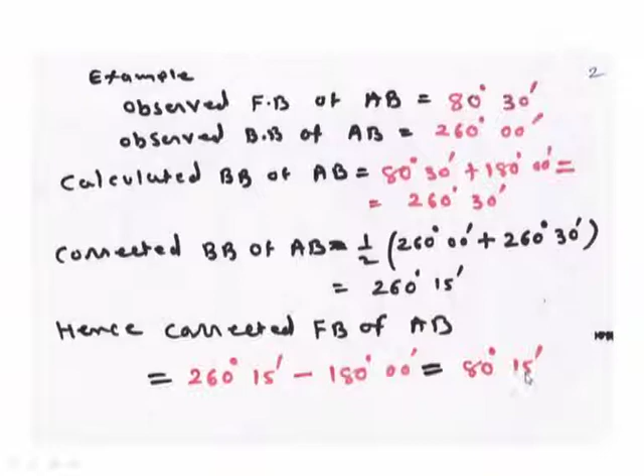Now, there are two methods to apply the correction for local attraction. The first method is the interior angle method. First, for our traverse, calculate all the included angles, and then apply the check, which is (2n minus 4) into 90 degrees. If the total sum of angles does not match (2n minus 4) into 90 degrees, there is a certain error. If there is no error, go ahead with the correction of the bearing. If there is an error, it is equally distributed among all the angles of the traverse. Then finally calculate the corrected angles.

Then, starting from the unaffected line, all other corrected bearings are calculated. How can you find the unaffected line? We have already told you that if the difference between fore bearing and back bearing is 180 degrees, then this line is free from local attraction. If the difference between fore bearing and back bearing is not 180 degrees, that means there is local attraction.

So out of the traverse, we have to find at least one line, or the line which has the minimum error. Then, as we have seen in the previous example, we correct the fore bearing and back bearing, and then by using our angles, we find all the bearings.

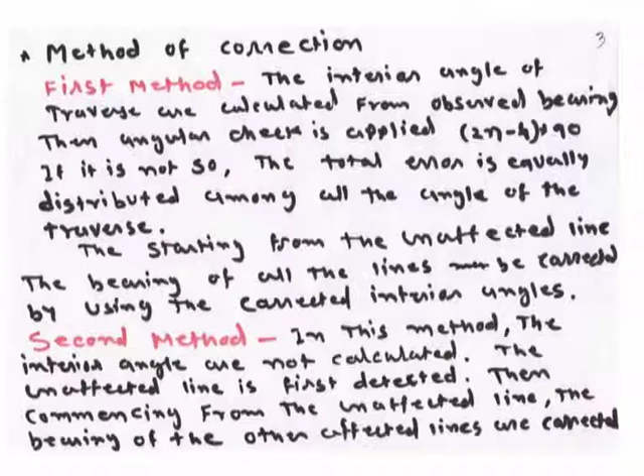In the second method, the internal angles are not calculated; the unaffected line is detected first. Starting from the unaffected line, we calculate all the bearings using fore bearing, back bearing, fore bearing, back bearing, and we correct the bearings first. Then we go for the calculation of the internal angles. So these are the two methods. Now let us see and clear things up.

Here the example is given: the following bearings were observed with a compass for the closed traverse A, B, C, D, A. The lines are AB, BC, CD and DA. Because it is a closed traverse, the starting point is A and the ending point is A. The fore bearing is given as 120 degrees, back bearing 300, 200, 20, 310, 131, 30. Now the question is, where do you suspect local attraction? Find the included angles and correct the bearings for the lines.

First, we have to find which station is affected by local attraction, as well as calculate the internal angles. Before solving any compass problem, first plot the traverse by approximation. One point is marked on the paper. The fore bearing of line AB is 120 degrees, so approximately draw a 120 degree angle and draw line AB of any length. Then mark point B.

From point B, we have the bearing of line BC, that is 200 degrees. So 200 degrees approximately comes here, and we draw another line, BC. Now we mark C, and we have the fore bearing of line CD, that is 310. So we draw line CD, and from D, because it is a closed traverse, the bearing of DA is given as 30 degrees, and approximately we join this line to A. So this is our complete traverse.

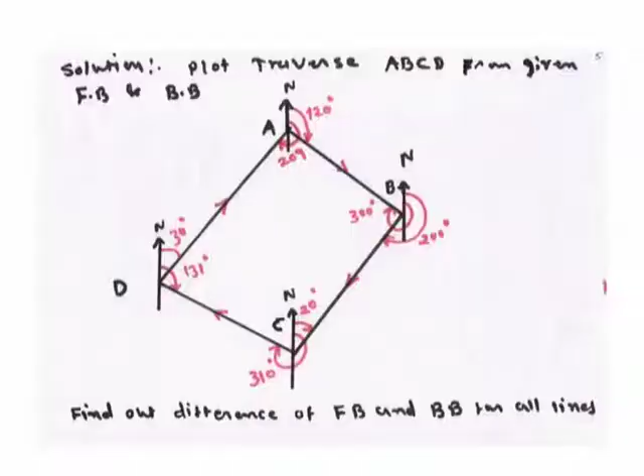If your summation of angles is 360, then there is no requirement of correction for the internal angles. But if there is a slight variation, say 361, or less than 359 or anything else, then you have to apply correction. Whatever the correction is, find it out, divide by the number of angles, and equally distribute. See how we calculate all these things. Now, first of all,

we put the line, forebearing, back bearing, and find out the difference. So here AB is 300 minus 120 degrees, that is 180 degrees. Here 200 minus 20, that is 180 degrees. Here 310 minus 131, that is 179. 209 minus 30, that is 179.

So from this table, you can see that here you are getting 180 degrees for the two lines AB and BC. Line AB and BC, that means the stations A and B are giving correct readings. Here stations B and C are giving correct readings. Only station D is not giving correct reading. Here the stations A, B and C are free from the local attraction, and the only affected station is D.

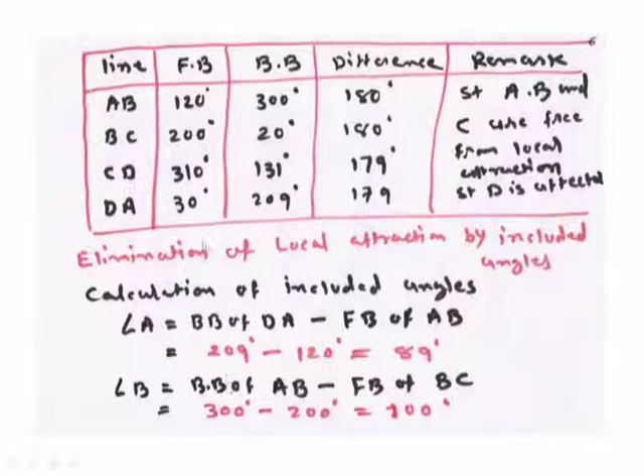Now, elimination of local attraction by included angle, because we are solving this problem by the first method. So first of all, calculate the internal angles, which I have already explained. Angle A is equal to back bearing of DA minus forebearing of AB, that is 209 minus 120 degrees, equal to 89. Similar way, angle B, that is back bearing of AB minus forebearing of BC, from this table, is 300 minus 200, equal to 100.

Now, from the figure I have already explained, there are two methods: the 360 minus exterior angle. This is the calculation of the exterior angle, that is forebearing of CD minus back bearing of BC. So 310 minus 20 will give the exterior angle. Subtract from 360, and you are getting the internal angle. And angle D is equal to back bearing of CD minus forebearing of DA, that is 131 degrees minus 30 degrees, equal to 101.

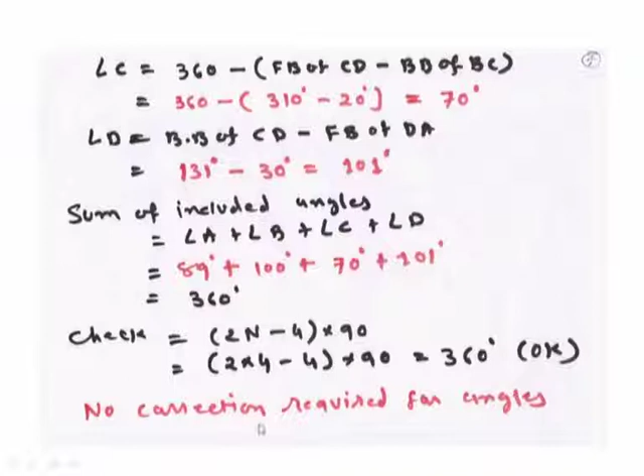Now, sum of the included angles, angle A plus angle B plus angle C plus D: 89 plus 100 plus 70 plus 101, the summation is 360 degrees. Apply our usual check, that is (2n minus 4) into 90, and here the n value is 4, so this is 360 degrees. So our calculated sum and check are the same, so there is no requirement for correction in angle.

Now our idea is to find out which station is affected by local attraction, as given in our example, as well as the corrected bearings. Here the stations A, B and C are free from local attraction. So whatever readings are taken from stations A, B and C are correct. So first of all, we list out the readings which are free from local attraction.

From station A, we are taking two readings: forebearing of AB and back bearing of DA. Similar way, from station B, we are taking forebearing of BC and back bearing of AB. And from station C, we are taking the forebearing of CD and back bearing of BC. Value may be anything, but we are taking these readings. Our stations A, B and C are free from local attraction, so all these readings are correct.

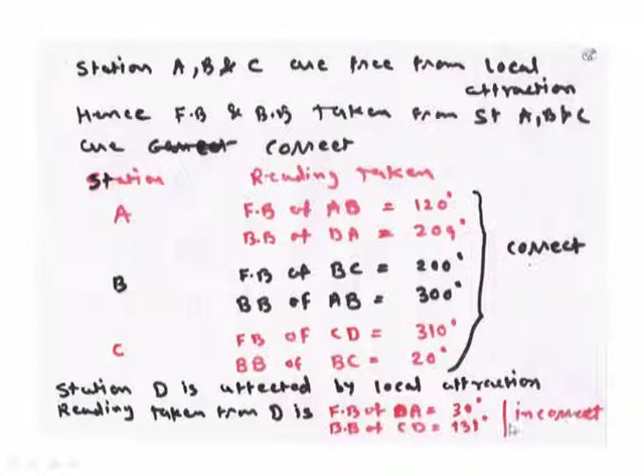All the readings are correct. By using this reading, we are correcting our D station reading. Station D is affected by local attraction. So from station D, what are we taking? We are taking two readings. Number one is the forebearing of DA, which is 30 degrees, and the back bearing of CD, that is 131. These two readings we have taken from station D are likely to be incorrect.

Now, how can we find out the correct reading? To find out the correct back bearing of CD, the forebearing of CD, 310, is given and is the correct value. Now using our formula, the difference between forebearing and back bearing is 180 degrees. Apply this equation and we find the back bearing of CD is equal to 310 minus 180 degrees, which is 130 degrees. So this is by our calculation.

And our observed value is 131. So there is an error of 1 degree. In a similar way, to find out the correct forebearing of DA, the forebearing of DA is equal to the back bearing of CD minus angle D. So here we are using the included angle, angle D.

We have a back bearing of CD which is correct. Here we are correcting this reading. So we put this value minus the angle, and we get the correct value of the forebearing of DA, that is 29 degrees. Once we get the forebearing of DA, the back bearing is simply, because this reading is less than 180 degrees, add 180 degrees. So it is 209, which is already given in our example data. See, this is 209. So what we found is right, because this is a cross check: calculated and given are both the same.

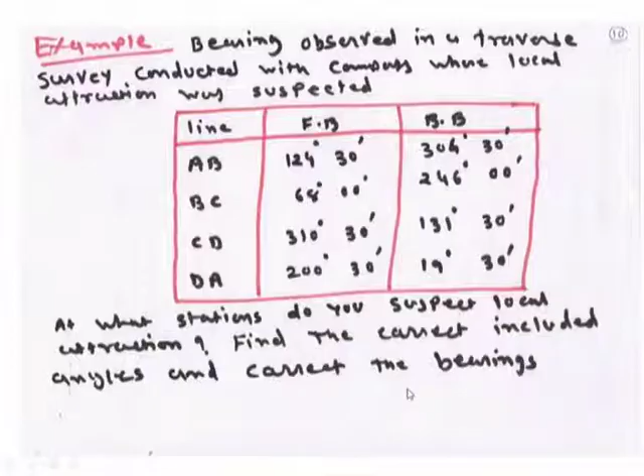Here we carry out the correction in the angles as well as in the bearings, so it is different from the first example. As in every example, whenever we require calculation of the internal angles, first we have to plot the traverse. This is the basic requirement. If you simply memorize the equation without plotting, you may make mistakes. So plot the traverse according to the measurements. The forebearing of line AB is 124 degrees 30 minutes, so this angle is approximately 124 degrees 30 minutes. Draw a line AB of any length.

Then from B, again mark a north line on the upward side. Now the fore bearing of line BC is 68 degrees. So 68 approximately comes over here. If it is 90 degrees, it will be like this. If it is more than 90 degrees, it is like this. If it is more than 180 degrees, it is like this. And if it is more than 270 degrees, it is like this.

So in which quadrant are you drawing the line? From common sense, you can draw this line. So use the fore bearing of the line BC of 68 degrees and draw a line BC. Now from C, draw a line CD, because the fore bearing of the line CD is given as 310 degrees 30 minutes. So it is in the fourth quadrant. So draw a line in the fourth quadrant of any length and mark a station D.

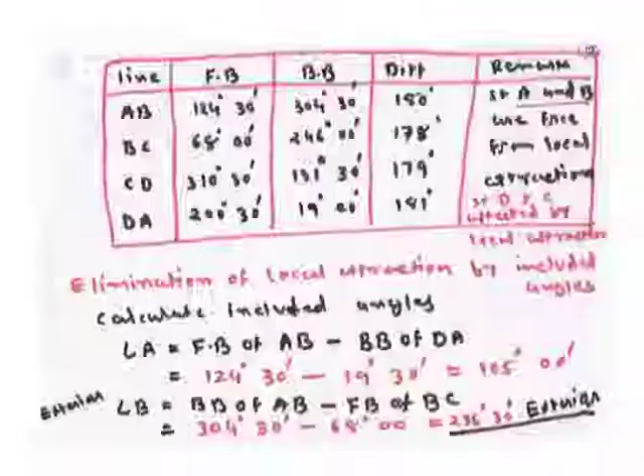Suppose the difference is 180 degree, as given here. That means stations A and B are free from local attraction. Now go to the figure. Here station A and station B are free from local attraction, so whatever readings are taken from A and B are right. Now from B we have taken the reading of fore bearing of BC. That is right because station B is free from local attraction. So if this fore bearing is right, then if we add 180 degree to 68, we get the back bearing. So the calculated back bearing is right.

So once we calculate the back bearing, then we add angle C, see the marker. If we calculate the correct back bearing, that means 68 plus 180 degree, we get the correct back bearing of line BC. Then if we add this angle, we find out the correct bearing of line CD. Forget about the previous reading. So we find out the correct fore bearing of line CD.

Then again go for the difference of fore bearing and back bearing, 180 degree. So here, whatever the reading you are getting, simply subtract 180 degree. So you are getting the correct back bearing. So once you have a correct back bearing and you have the corrected angle of D, correct back bearing plus the angle D gives you the correct fore bearing of line DA.

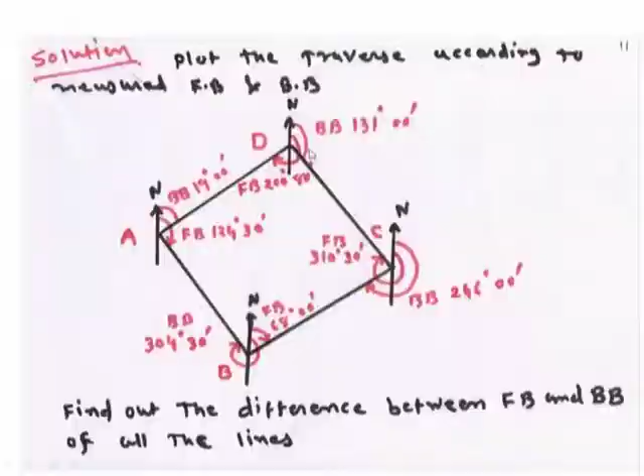First select the line whose fore bearing and back bearing differ exactly by 180 degree. Here for line AB, the bearings differ exactly by 180 degree, so both fore bearing and back bearing are correct. So first consider line AB. Fore bearing is 124 degree 30 minute and back bearing is 304 degree 30 minute. These are the correct readings.

Now for the line BC. From station B we are taking the back bearing of line AB, which is correct. So we have an exterior angle. Simply put the value 304 degree 30 minute minus the exterior angle of B, which we have already calculated, that is 360 minus the internal angle of 123 degree 00 minute. So you are getting 67 degree 30 minute, which is the correct fore bearing of line BC.

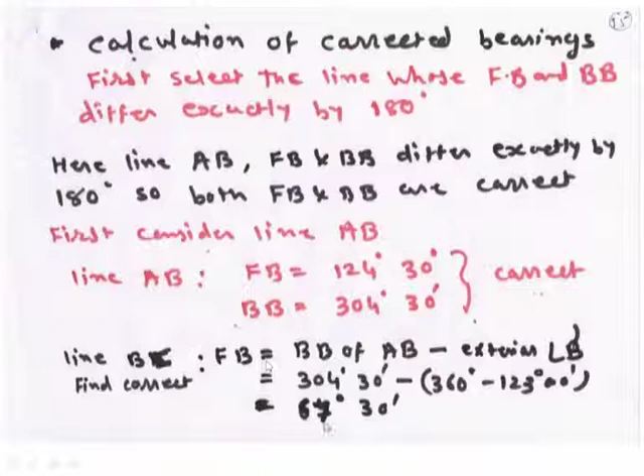Okay. Now we have the fore bearing of line BC, and we can calculate the back bearing. Because this figure is less than 180 degree, simply add 180 degree. So 67 degree 30 minute plus 180 degree is equal to 247 degree 30 minute. That is the corrected back bearing of line BC.

Now we have to calculate the fore bearing of CD. Okay? The back bearing of BC we have calculated, and we have the internal angle of C, which we have already calculated and corrected. So put here 247 degree 30 minute plus the internal angle of C, that is 64 degree. The value we get, 311 degree 30 minute, is the correct fore bearing of line CD.

Once we get the fore bearing, because this value is more than 180 degree, we can easily calculate the back bearing: 311 degree 30 minute minus 180 degree 00 minute is equal to 131 degree 30 minute. Similarly for line DA, fore bearing is the back bearing of CD plus internal angle of D. Here 131 degree 30 minute plus 68 degree 30 minute gives 200 degree 00 minute. And back bearing is 200 degree 00 minute minus 180 degree 00 minute, equal to 20 degree 00 minute.

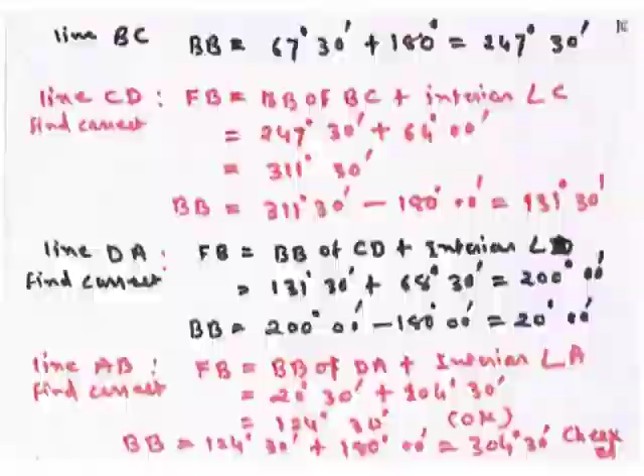Internal angle method. So here we have seen two examples. Number one, where there is no requirement for correction of the internal angles: internal angles sum to 360 degree, our check is 360 degree. The only requirement was correction in the fore bearing and back bearing of a line. In the second example, there was a requirement of correction in the internal angles also. The first one is in clockwise direction, the second one in anti-clockwise direction.

For calculation of the internal angles, in the first traverse we used a certain equation, and for the second example a different equation. So don't memorize, I am repeating, don't memorize the equation. First plot the traverse, then look at the figure and calculate the internal angle and external angle.

Because when you plot a traverse, I cannot say 100%, but in 90% of cases, at one angle your north line comes inside. So for that, you have to calculate the exterior angle. The exterior angle is required in that case. Without plotting this, we are unable to know at which angle the north line comes inside. When you do a lot of practice, you are able to understand that at angle C or angle D or angle A, any angle, the north line can come inside.